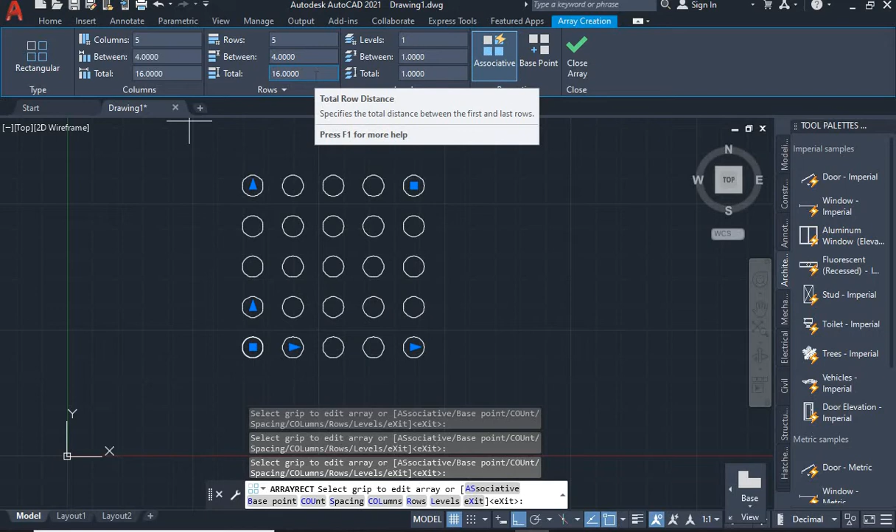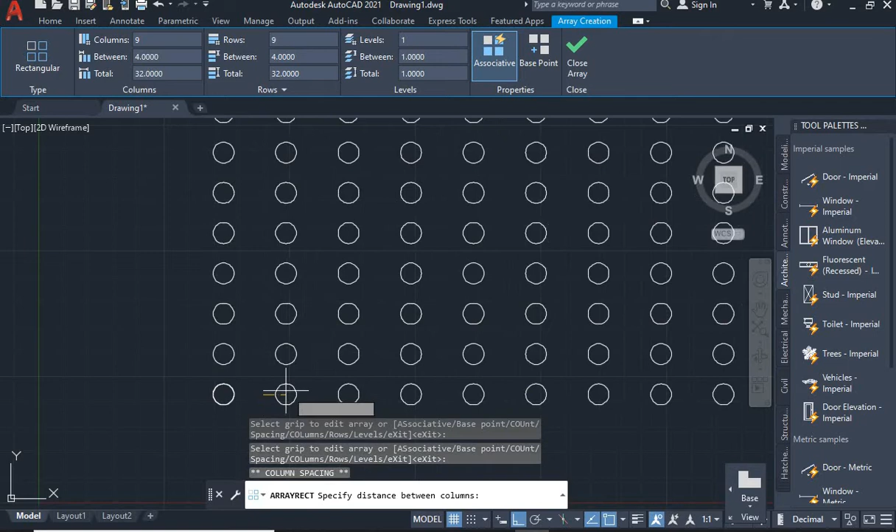Now, whatever we've done using values can also be done using these triangles. If I drag this triangle, the number of copies increases along the column, and if I drag the other triangle, the number of copies increases along the row. If I change this triangle, the distance varies along the column term, and this triangle helps with distance in the row term. This is how we make rectangular array.

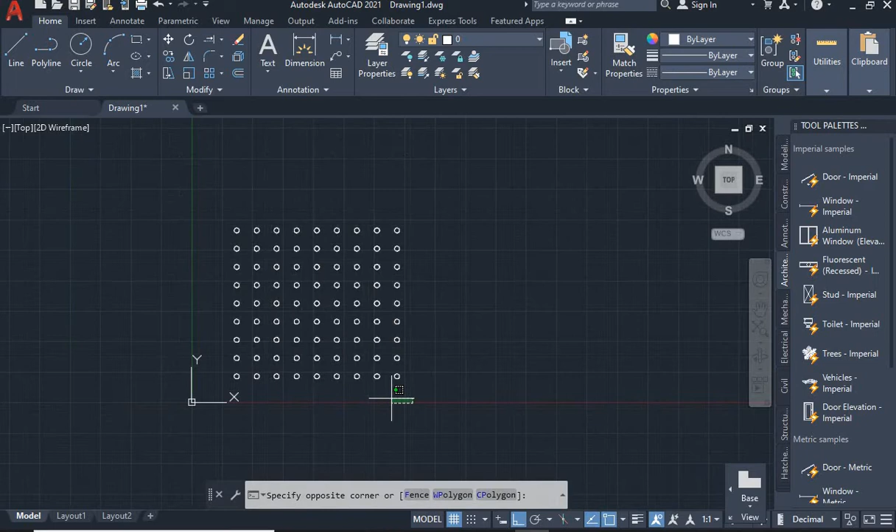Now, after making these changes, just finish it off. This is the basic array. Whatever we've learnt is just the basics—in depth there are more commands we can cover in further classes, but for now understand rectangular array in basic terms.

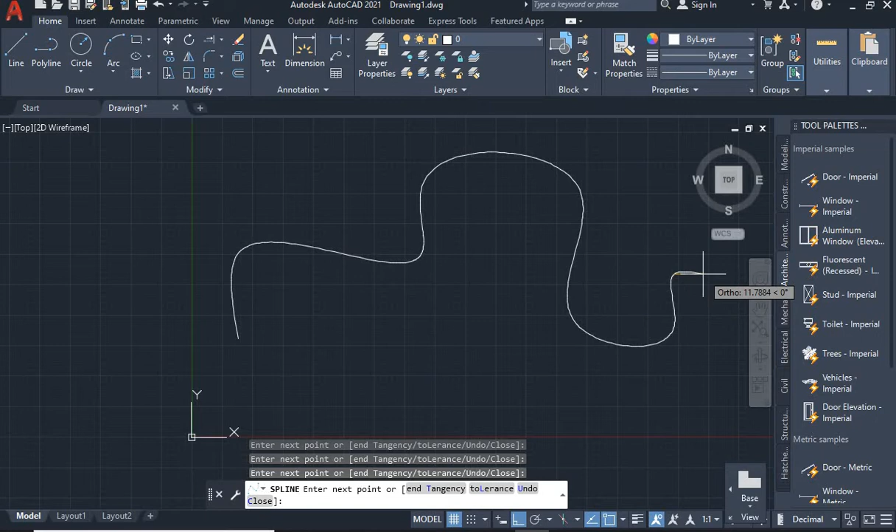After this we have path array. First, I'm going to create some path. For example, this is my path. Into this path I want this circle to run throughout, so I need number of copies of my circle along this path. I'll select this component and take path array.

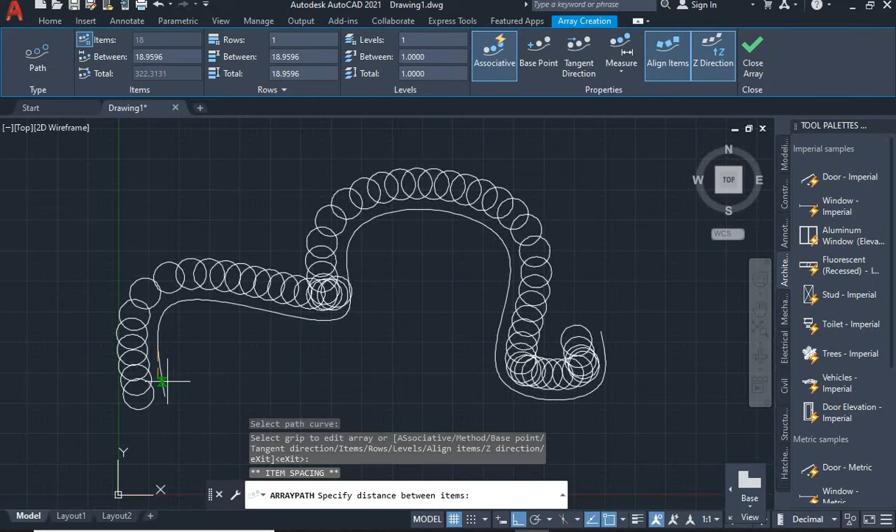I'll select this as my path. You can see the number of copies has run through this point. Now if I increase this, you'll get more copies in this direction. This is how we make path array.

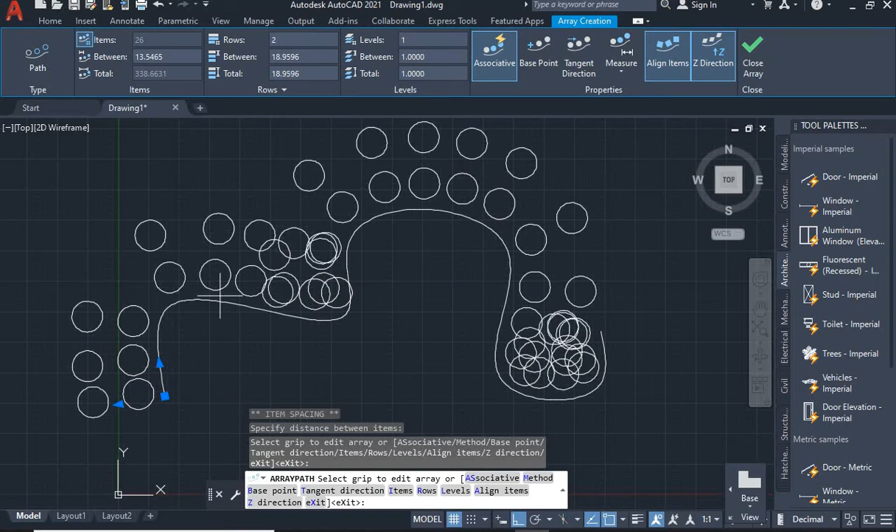Even for path array we have distance and numbers. Right now there are 18 components, which I can increase or decrease using this triangle. Now I've got 26 components, and currently only one row is running here. If I make it 2 rows, I'll get a first row and second row. Next, distance—I can change it. I'll give 10 here and 20 for the row distance. This is how we get path array for a particular object.

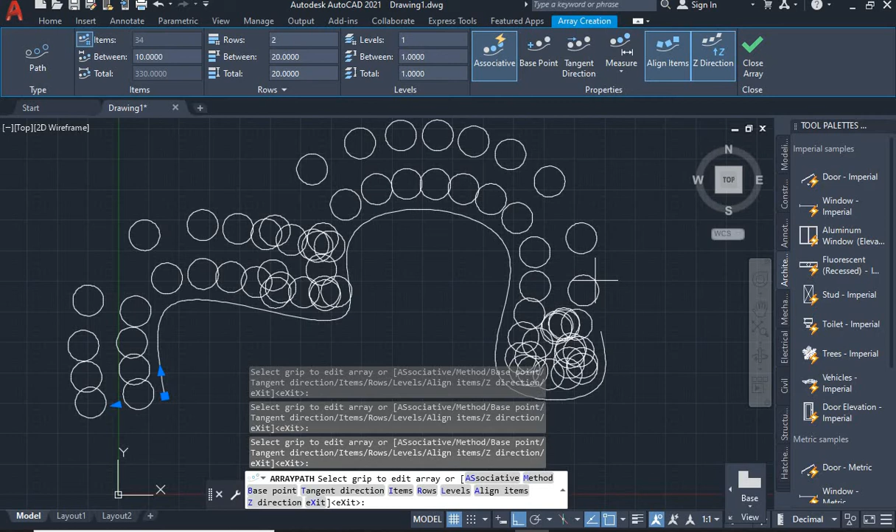I'll finish it off—this is how we get a particular object using path array.

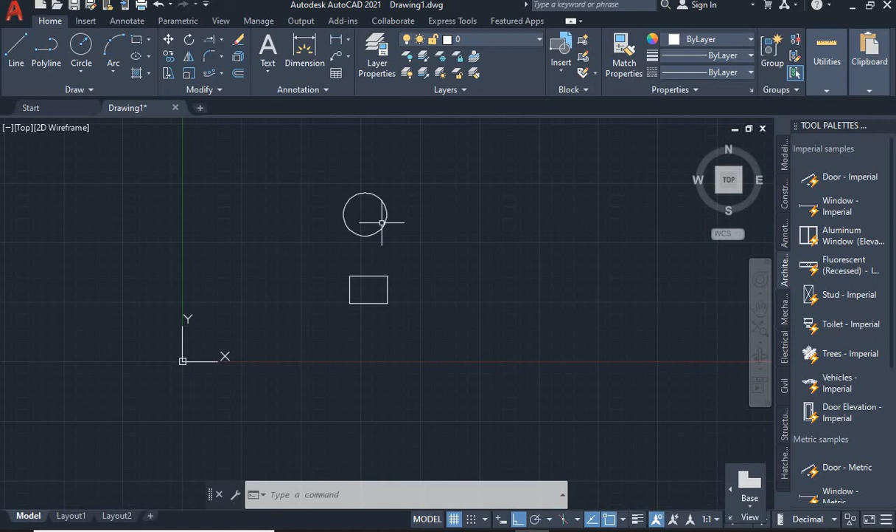Now after this we have polar array. Take up a particular object—I want this setup to be placed in a circle, meaning I need it in terms of a polar path, polar meaning 360 degrees. I'll select the component and go to polar array.

For polar array, what should be the midpoint? This is my midpoint, and now you can see I've got these many copies by default. Here I can change the value—if I need 5, I can set it to 5, and I can increase or decrease the distance. If I decrease it, you'll get only half of it.

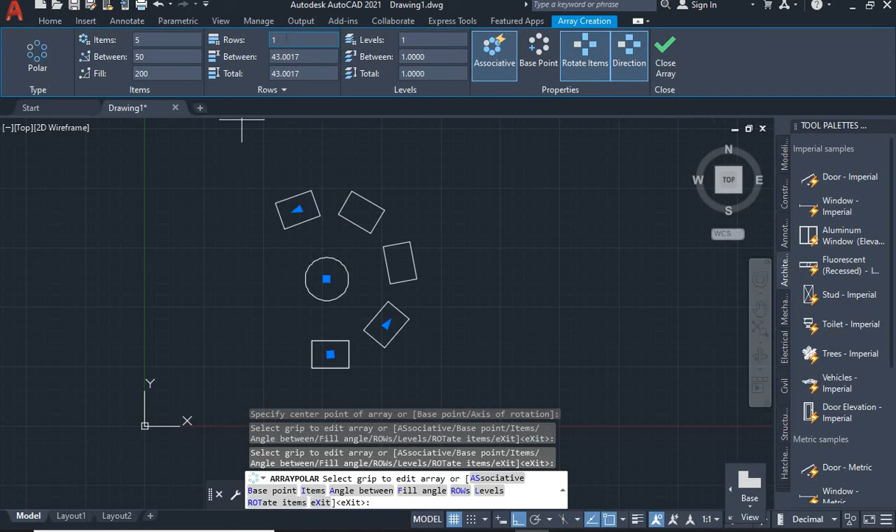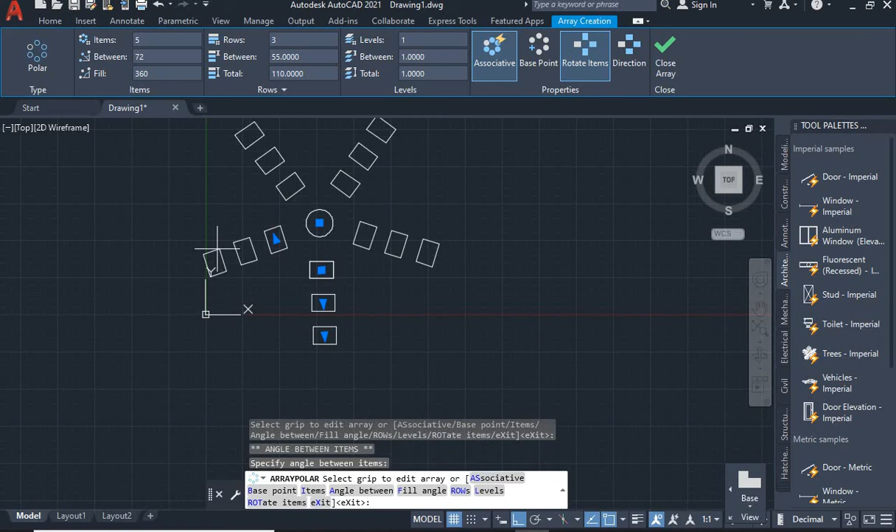Right now I have only one row. If I need more rows, I can change it—since I typed 3, I now have 3 rows. I'll increase the distance, and you can see the distance has also increased. The same changes can be made using the triangle as well. This is how we make changes with number of copies and number of rows.

So this is polar array. In today's session we've learnt all 3 kinds of array. In the next session we'll learn about offset and how to define a table. Thank you.